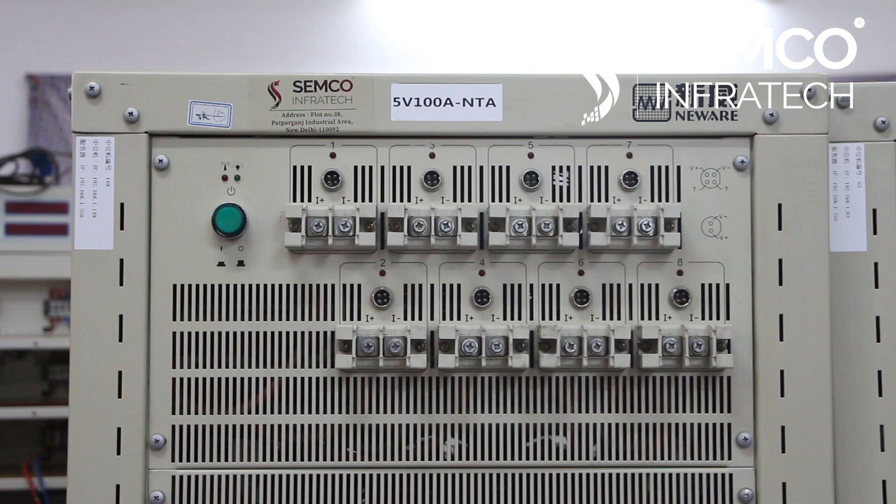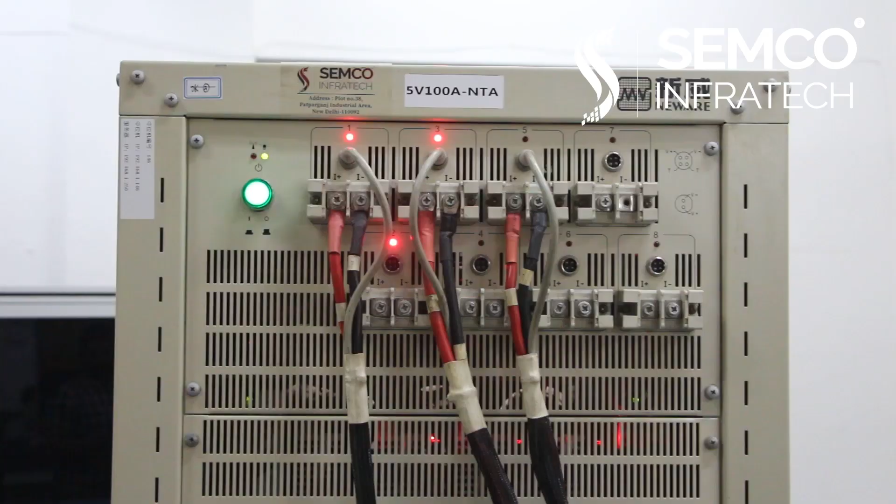Today I am going to show you the connection and operation of the Neware 5V 100 ampere 16 channel cell tester. This Neware 5V 100 ampere 16 channel cell tester is used for testing and capacity grading of cells having higher Ah rating. This machine requires 3-phase input supply with voltage range from 390 to 415 volt, and total power consumption of this machine is 11 kW.

In this cell tester you can also test and run individual channels by programming them independently. This device is suitable for both R&D and production purposes. It also comes with a temperature sensor.

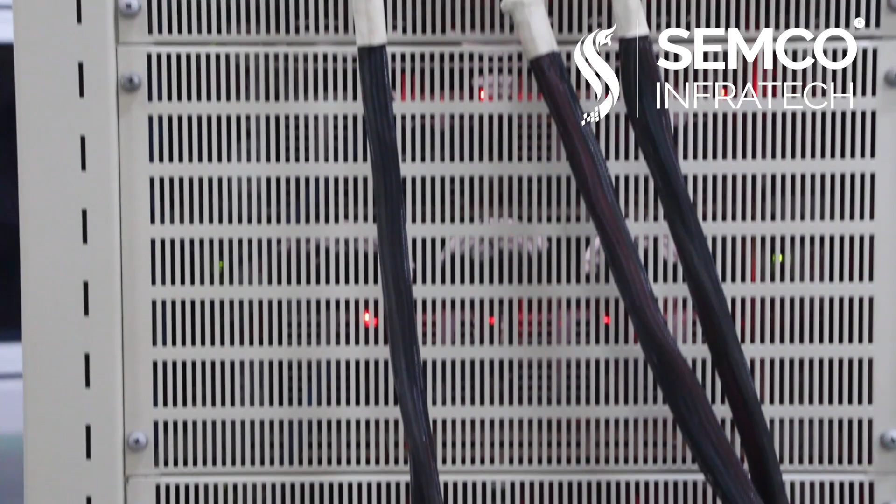Why should you use this device? After purchasing new cells with higher Ah ratings, we need to check the charging and discharging characteristics and capacity for making a good battery pack. And also we can do capacity sorting according to their Ah ratings. And for that purpose, these machines help us in deciding the Ah rating.

This is the 3-phase supply we have given to this machine, and here you can see the cell connections are done. Here I plus and I minus for the charging and discharging cable connection, and this is for the V sensing communication cable. We have connected these to the cells' positive and negative terminals. Here we have given 3 cells for demo.

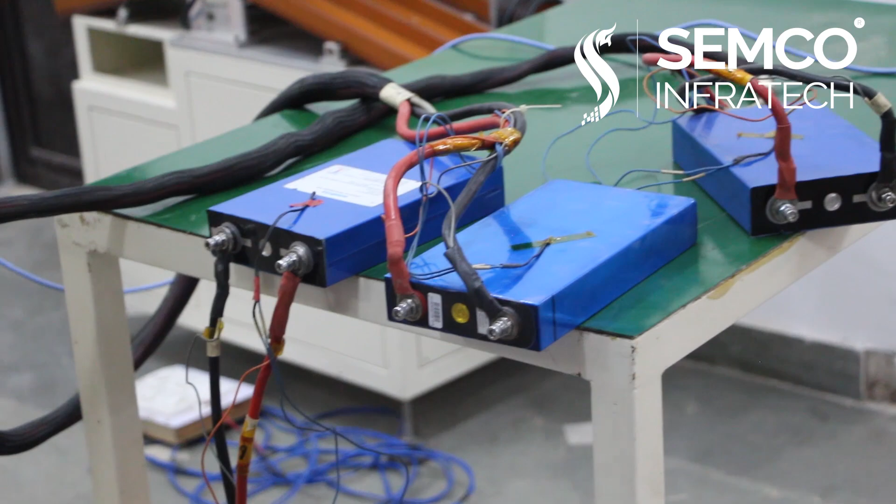This device requires LAN connections with TP-Link communication. So look here, the wire is coming from the machine and connected to this TP-Link, which is supplied with single phase supply, and then another LAN communication cable is connected to our PC for communication.

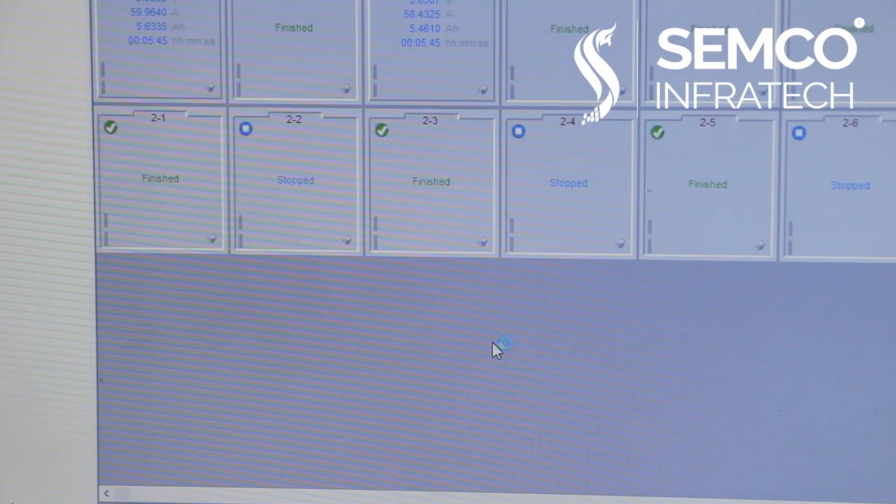So this is the software for the Neware cell testing machine, BTS 7.5.4. By double clicking the software you can open it. Here you can see this communication number is for the COM port connection of this device, which is 003, and here you can see all the cells connected here.

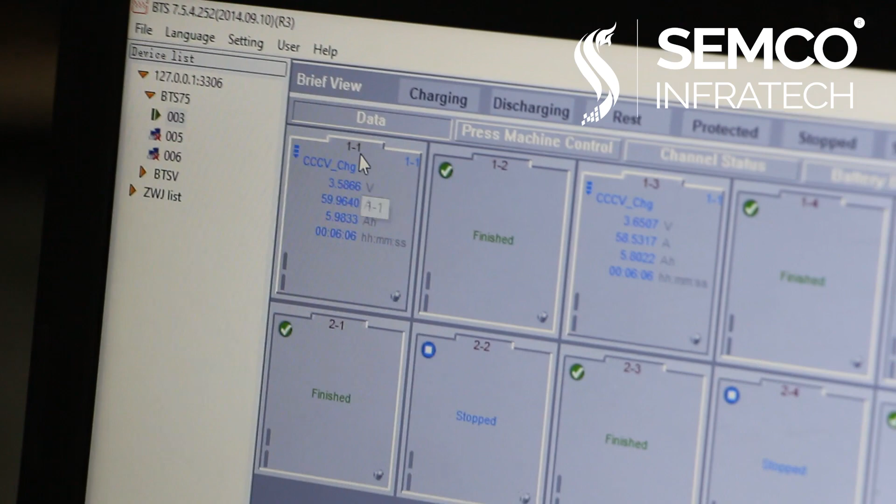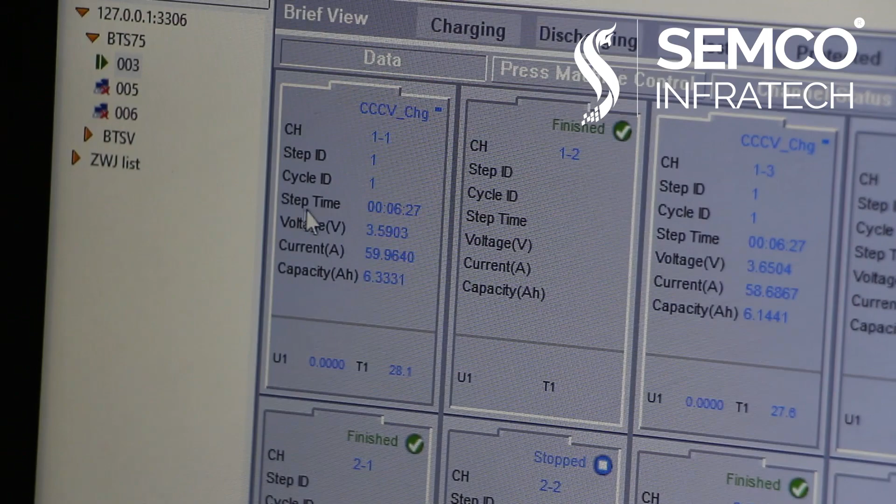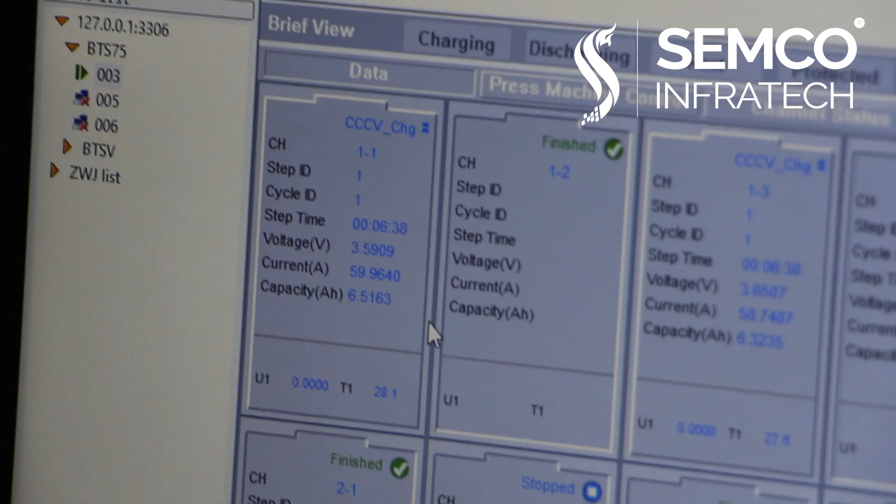Here you can see channel 1 is now charging in CCCV mode, and channel number 3 is also in charging condition. Here you can go to text view for all the data, like channel number, step ID, cycle ID, step time, how much time it has done, voltage, how much voltage it is showing right now, the current it is charging at, and capacity, how much capacity it has given. And here you can also see the temperature.

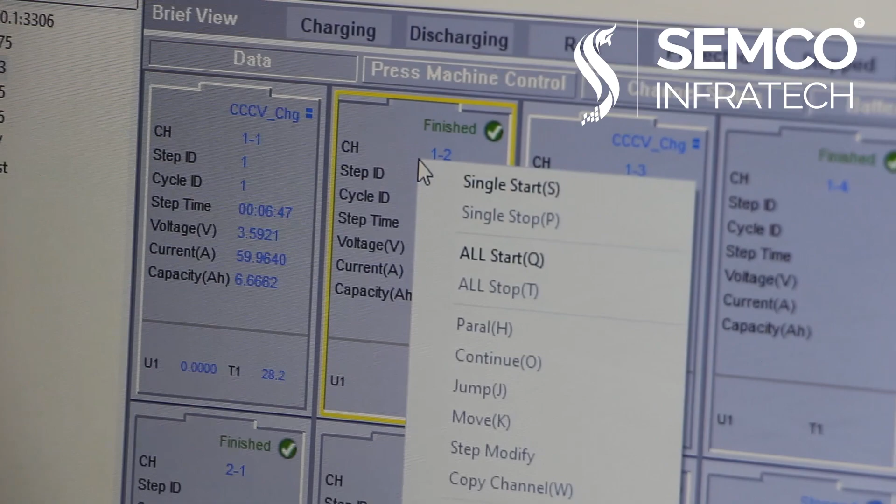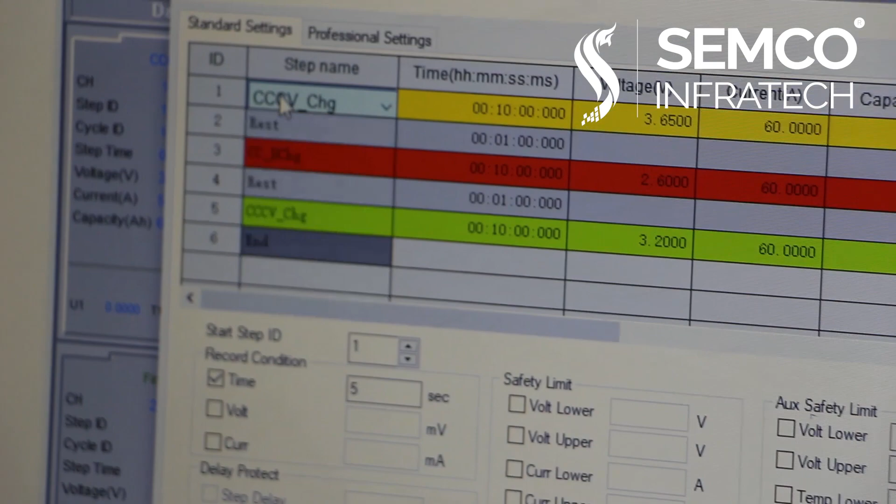For programming, I will program channel number 2 here. For this you have to go here, single start. Here you need to program the process. Here we have given CCCV charging for 10 minutes, with voltage up to 3.6 volt for charging, and current 60 ampere.

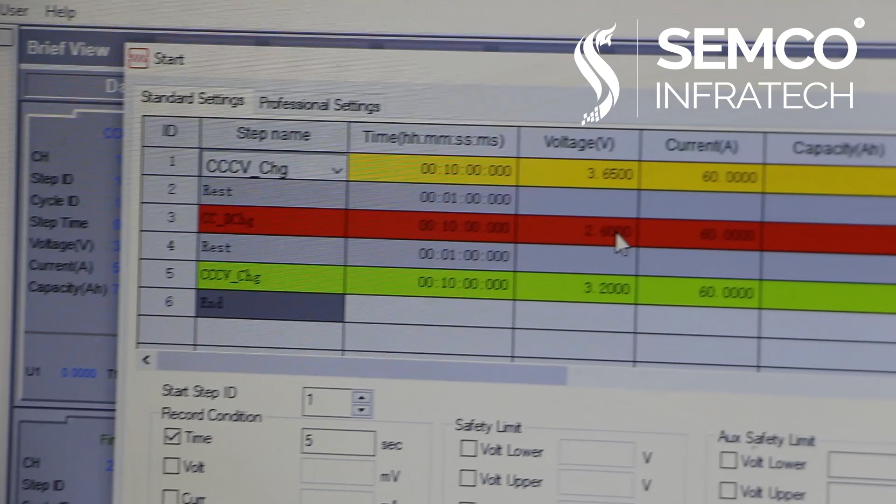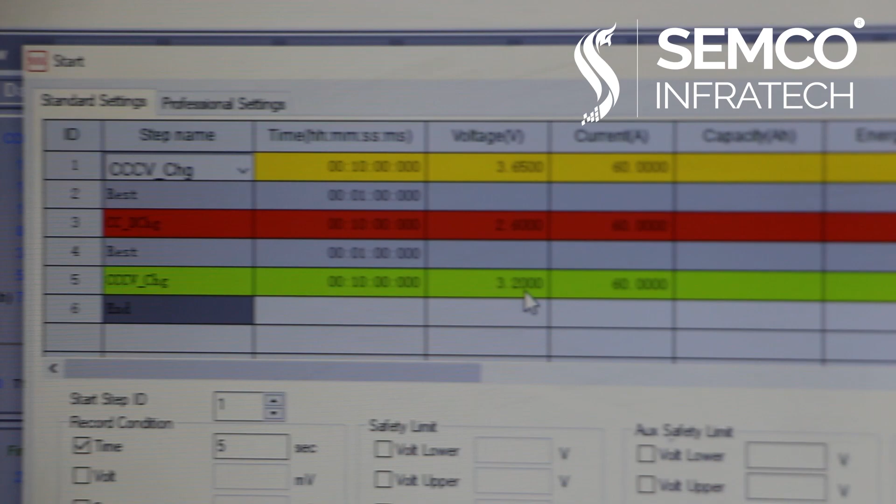And then we go for rest for 1 minute, and then discharging at constant current for 10 minutes down to 2.6 volt at 60 ampere current, and then again rest, and after that charging again in CCCV mode for 10 minutes up to 3.2 volt at 60 ampere. This is the process for our testing.

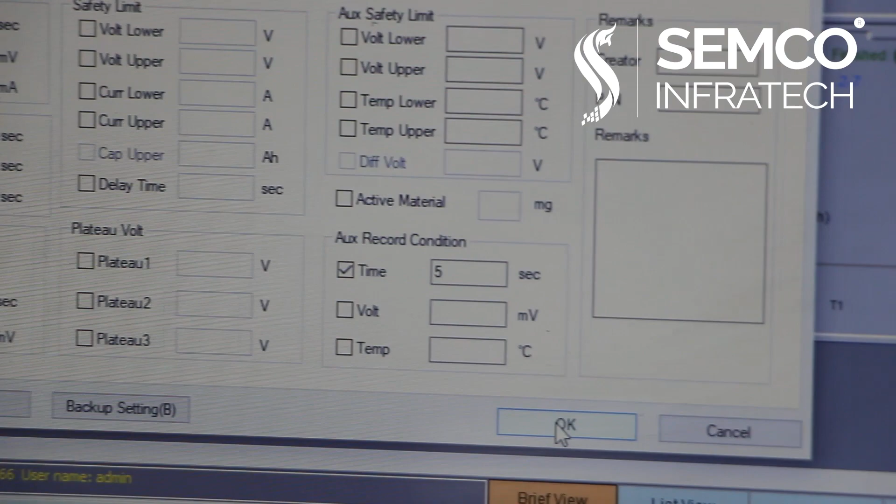And here you can set the time interval at which we want to take the data. Here you can see time 5 seconds, and after that you have to save that. If you are making the program for the first time, you have to save it, otherwise you have to select OK. Once selected, the program will start. Here it is asking for a barcode, but we don't have barcodes for the cells right now, so we will start it without a barcode. Empty barcode, are you sure you want to start? So you have to put yes.

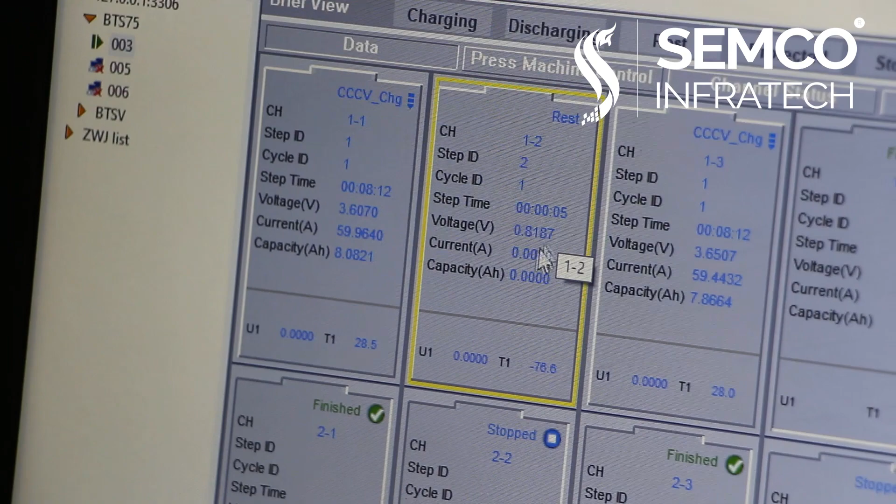Now you can see the process has started. You can see here it's jumped from CCCV to rest because it's already charged, so it jumped directly to rest period. For stopping, you can click on single stop, and for jump you can skip to next steps also by pressing this jump option. And here you can go for view data. Here this process is done, so we will view the data from here, view data.

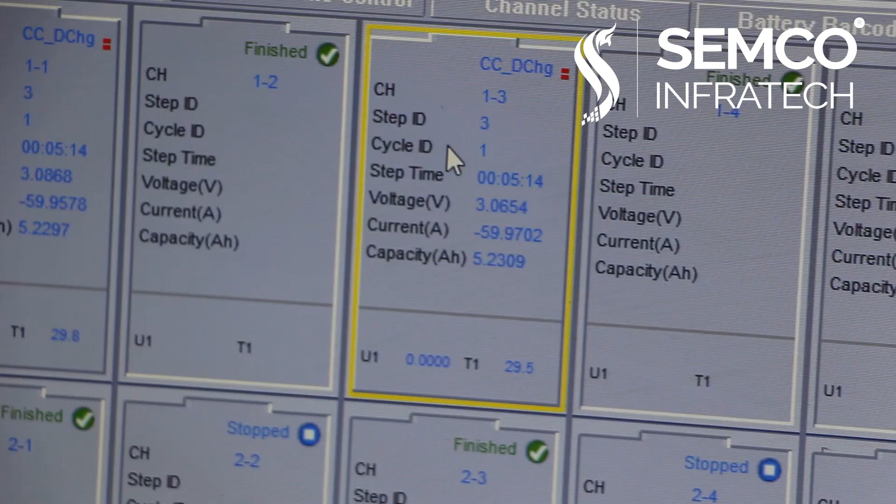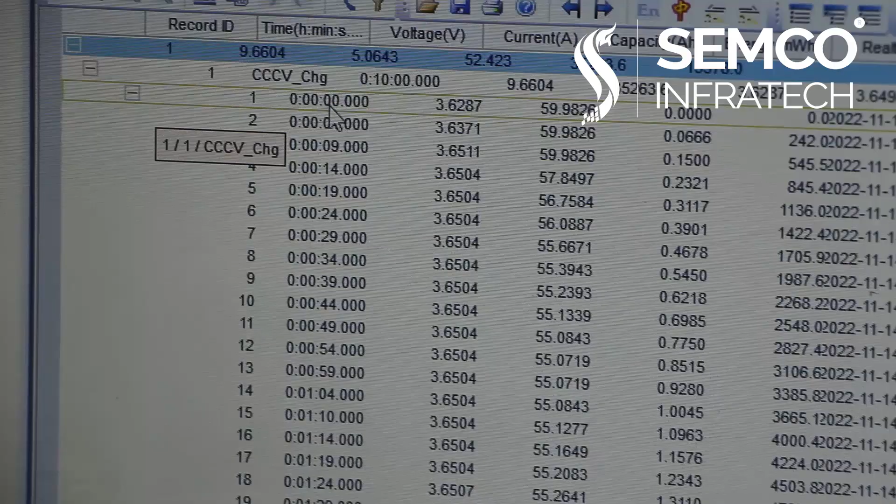So for data view, you can go from here, you select view data. Once this is loaded, here you can see all the data. Each 5 seconds you will get here, 5 to 10 second data is here. You can see here 0 and then 4, like this. You can see here voltage, your current rating, and your capacity, and time and date. According to that you will see all the data.

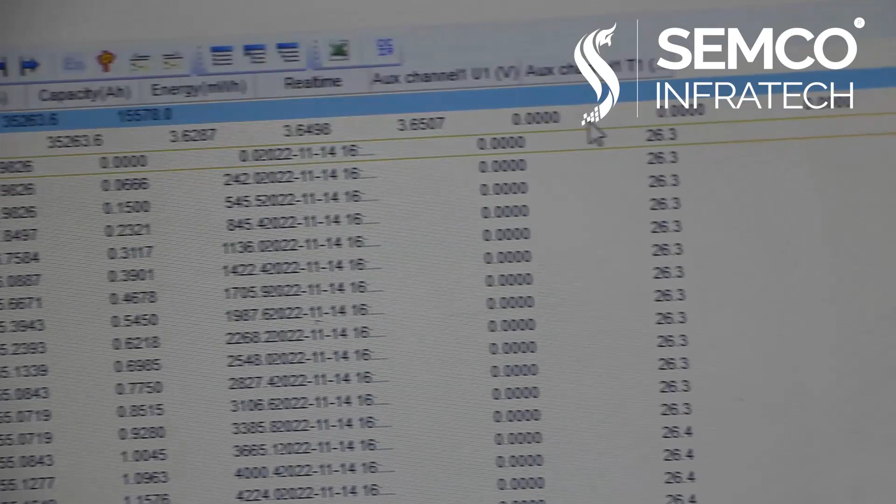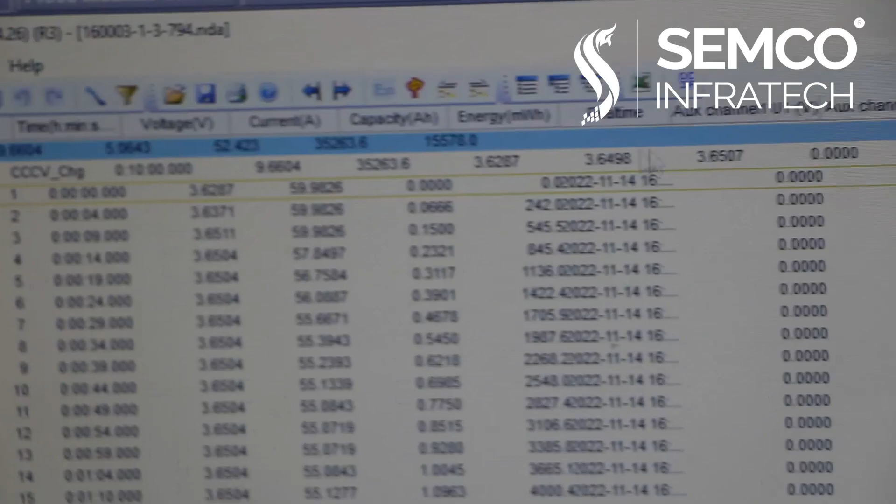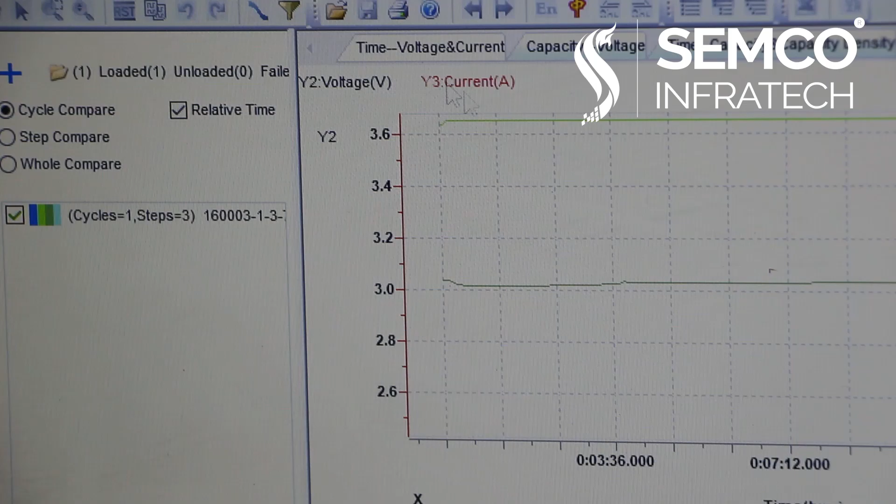Here you can see also record number, time, voltage, current, capacity, energy, real time data. And also here you can see temperature, which is provided with this machine. And for curve data you have to go here, select this comparative view. Here you can see the data according to your creation. Like here you can see time, voltage, and current data.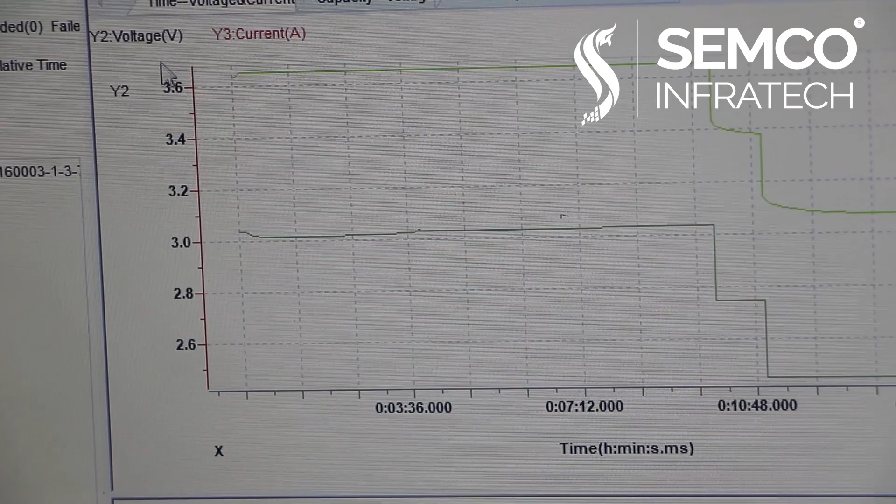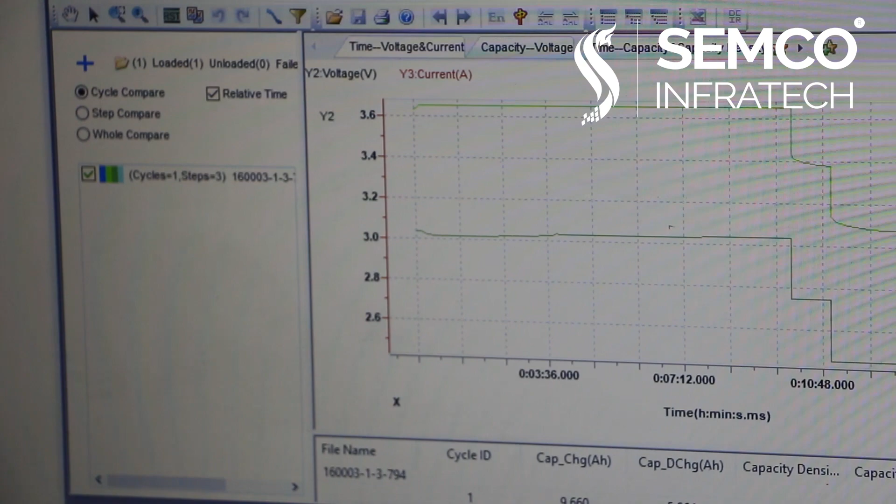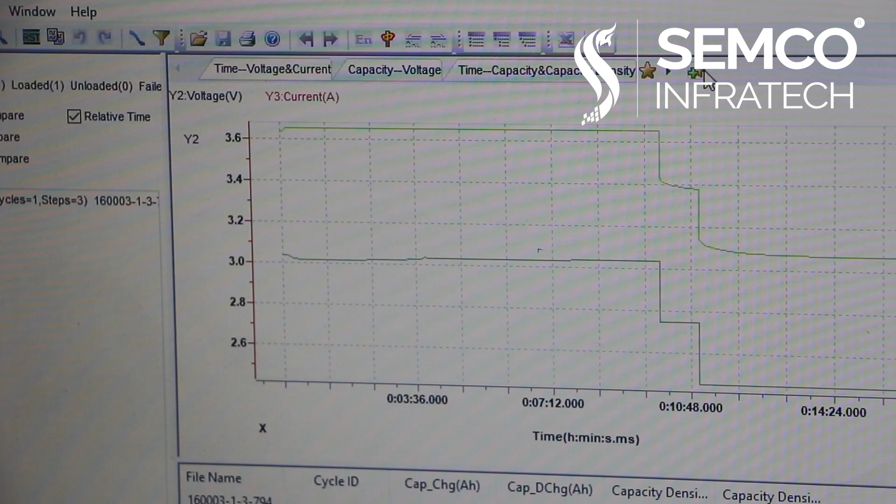So here in the x-axis you will find the time data and time curve, and here in y, this side you will find, sorry, this side you will find current, and here you will find the voltage. And here you can see also there is capacity-voltage graph also available, time, capacity, and density graph also is available. And you can also create new graph by clicking here and selecting whichever curve you want. And this is all about this view.

And for exporting data you just need to click here, go to view data, and from there you will need to just select this export file. Once you export here and select your name of the file, testing, you can see your data in Excel file also.

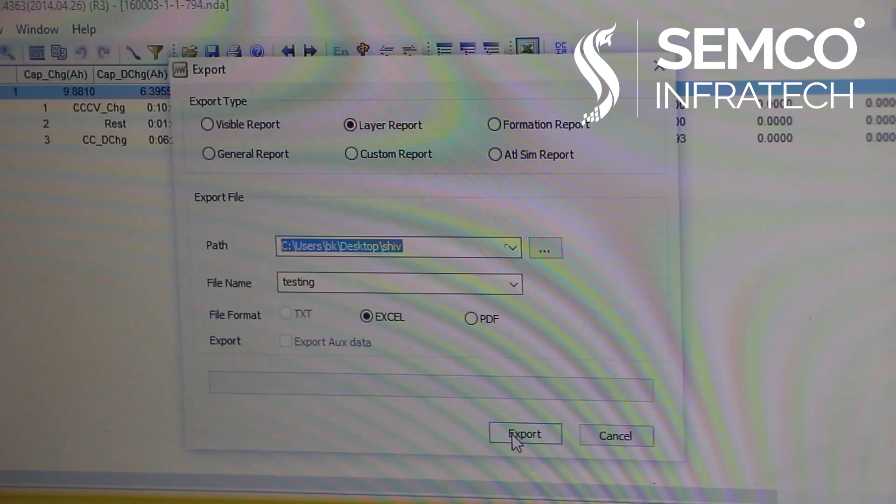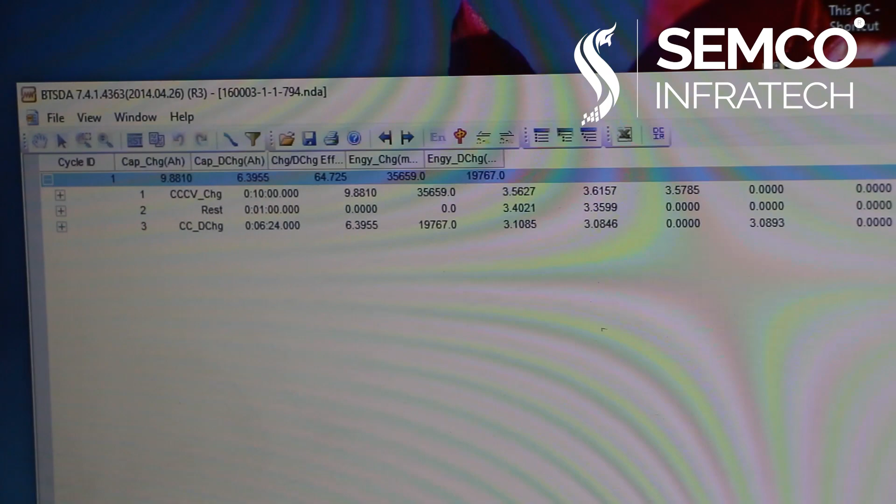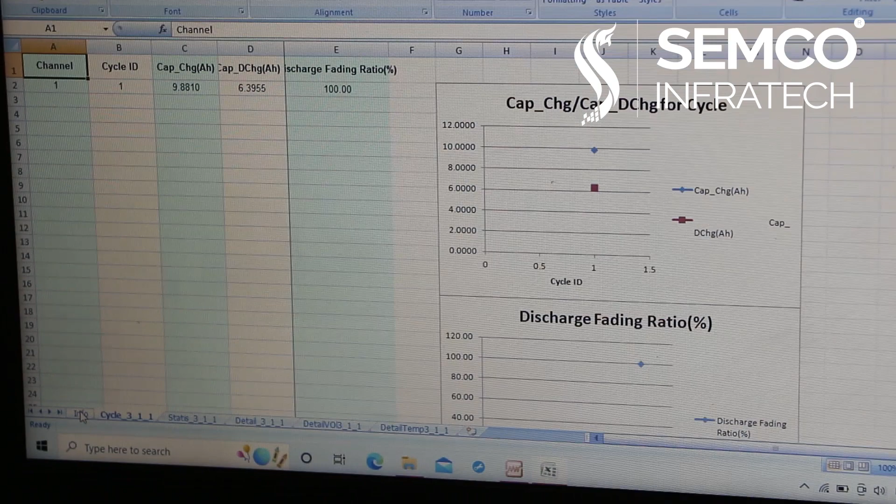Once complete, you can go there in the folder and see all the data. Here in this folder the data is saved. This is the data. So this is testing data. Here you can see all the data you require after testing. So this is all about this 5 volt 100 ampere 16 channel cell testing machine of Neware.

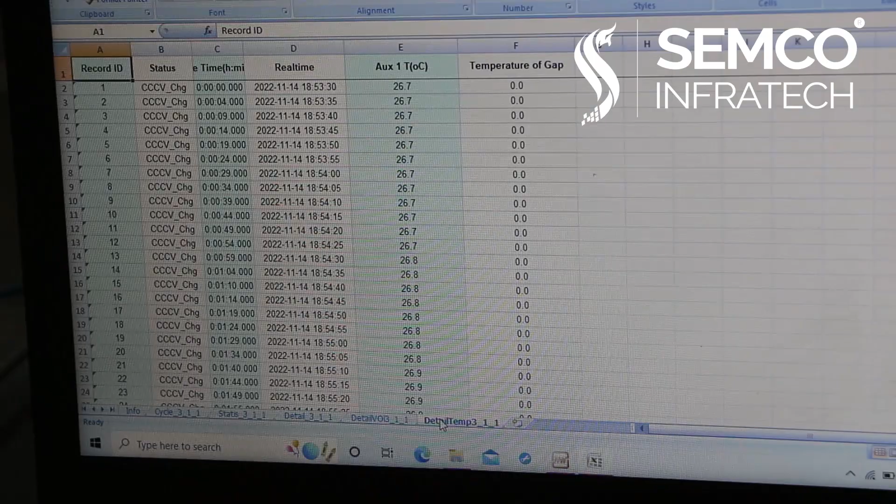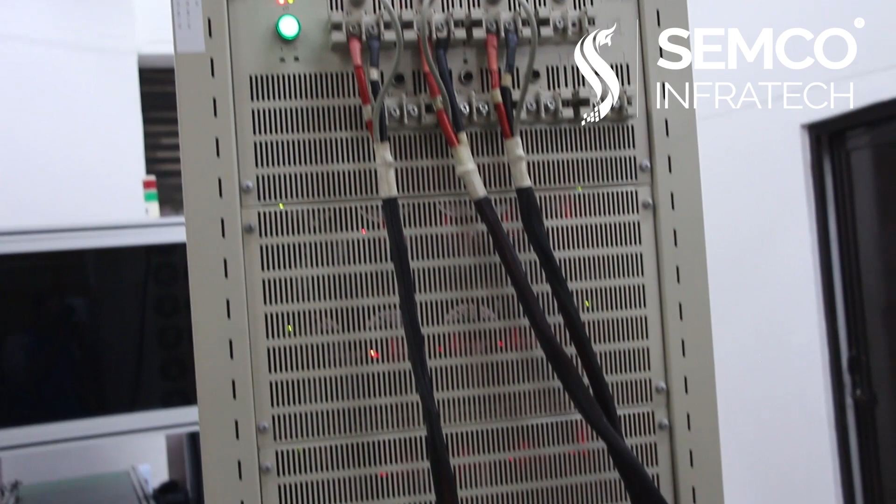Issues in this machine. If we talk about the device related issues, then communication issues arise when the device doesn't communicate with your PC. To resolve this issue, you need to check the TP-Link connection and power supply is connected properly or not. Then check IP address, which is 192.168.1.250. Then if everything is okay with the connection, the communication related issue resolves.